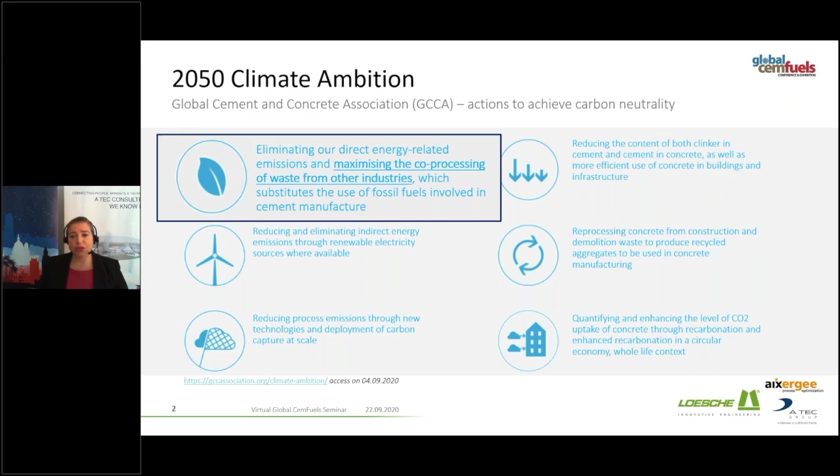And I have to make a side note here. Waste, I do not like this term when it's used in this context, because of course waste is there, but you're not using waste in the cement industry. You're actually using alternative fuels. You're using, let's say, the usable part of waste.

This is a conditioned material, so you're not using waste, and this can actually cause a lot of difficulty with public opinion, especially if the cement plant is applying for a first permit, etc. So I prefer to really use the term alternative fuels and not the term waste.

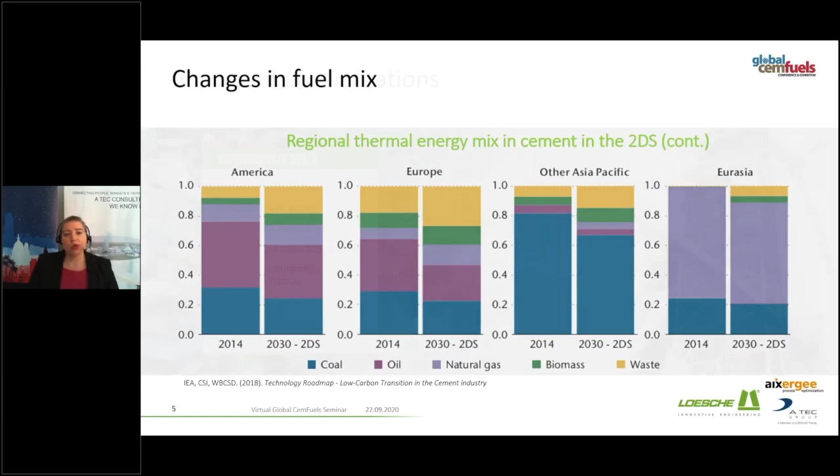Now, if you're starting a project in alternative fuels, regardless of which stage you are at, you need to make some important considerations. For example, external factors that will affect your project, like superordinate goals. If you are in a private cement plant, this is a different thing. But if you are in a big corporation, you will have corporate goals that set targets you need to achieve: CO2 reduction targets, fuel cost reduction targets, and a lot of sustainability initiatives shared between cement corporations and other industrial sectors.

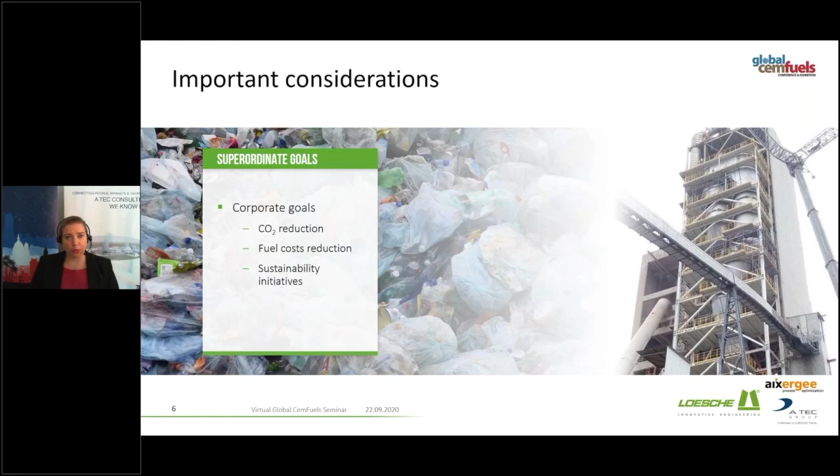So you need to be aware of this while you're gearing up for an investment in alternative fuels. And the second factor is, of course, you need to know your stakeholders and your partners. Why? Because they can make or break a project if you don't consider how they play a role. So of course, local government plays a role, especially in areas where there's not a really developed waste management system.

Waste generators: do you have waste generators around your plant, other industries that can supply you with some monocharge material, which is more controllable? Are there local waste conditioners already, or does this need to be created from scratch? And this really elongates the process.

Who are the original equipment manufacturers that you can count on? What do you want to use? And who's going to be responsible for the complete engineering, for the complete concept that you need in order to achieve your goals?

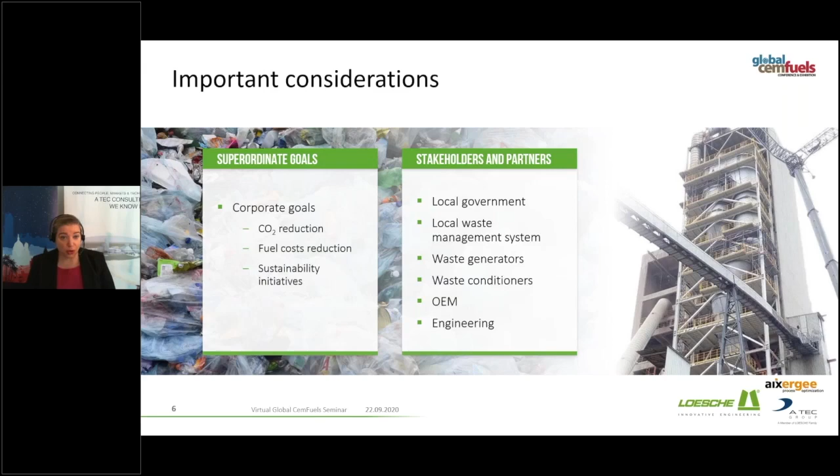And then last but not least, of course, within the cement plant, you need to check what is the fuel availability? What actually do you have around your cement plant? What types of fuels and what is usable for you or not? Do you want to do any type of conditioning within the plant itself? This has advantages with quality monitoring, for example. Or do you want to just buy or get the fuel already ready to use delivered to the plant? What are the quality requirements for your process, and what kind of steps of quality monitoring are you thinking about?

And plant personnel, this is really a big issue, which sometimes is ignored at the project setup, but especially if you haven't been dealing with alternative fuels yet, and there are a lot of plants in the world which are not there yet. You need to get your personnel not only trained, of course, that's not an issue, but they need to be on board with it. They need to understand why you're doing this, because they can make or break a project. The best project, if the people cannot operate it or don't want to operate it, will fail. So you need to take these people with you and motivate them to actually use this.

And of course, logistics. This is a point which is also sometimes ignored, especially by clients who don't yet deal with this. Because of different densities, for example, you need to take into consideration, also on the long term, how much more traffic you're going to generate into your cement plant. And is this feasible? Is this going to actually disturb your normal operation? So this is something that you need to see, and you need to see this on the long term.

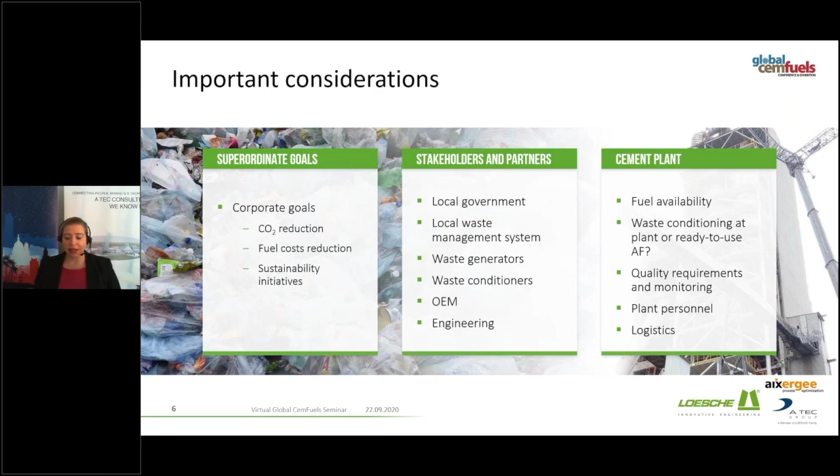And now exactly we're going to talk about short, medium, and long term, because this is something that once you're starting the project, you need to take into consideration. Of course, plans can change throughout the years, but you need to have a long-term goal to see where you're going. And that means that you need to consider, for example, logistics problems, reception and storage problems in the beginning, because you need to make a place for this. You don't want to have to remove the equipment and move it over to another side because you didn't think about it. And it is amazing that this still happens. It seems obvious, but when people are under pressure to put a project together and present it to the board, sometimes these things get really forgotten.

So you need to see and think about what your goals are at each stage of the project. Even if you start small, you want to do less capex, that's fine, but you need to have this overview. What's possible in your plant setup, in your kiln? If you have a preheater kiln, you may have to do a lot more investment to achieve a goal, which might make it unfeasible. We don't know. So this is something that really needs to be taken care of.

Now, one side note here is that, as Andy mentioned in his presentation, CO2 is becoming one of the major drivers. Why? At 25 euros per ton right now, we're entering the fourth period of the European trading scheme. And where the prices are going to go, we don't know. We only know that they're going to go up. There's speculation saying that it's going to go to 30 euros a ton, or 35 euros a ton. And at 35 euros a ton, with oil at about 40, this is a huge driver. So this is something that will actually make projects in the future as well.

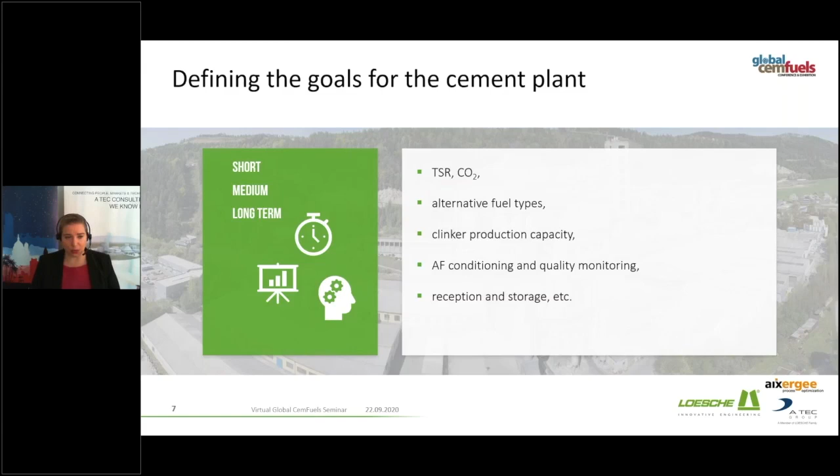Now, as you all know, and I'm not going to spend too much time on it, what the strategy looks like depends on where you are in terms of thermal substitution rate. If you're in the beginning, of course, your kiln is a lot more patient. You can deal with more coarse materials, with more moisture, etc. Still, you need to keep your final goal in check, but you have more external factors that play a role at those levels. When you go into higher TSRs, this becomes extremely crucial, and this is actually where the focus is in the cement plant itself.

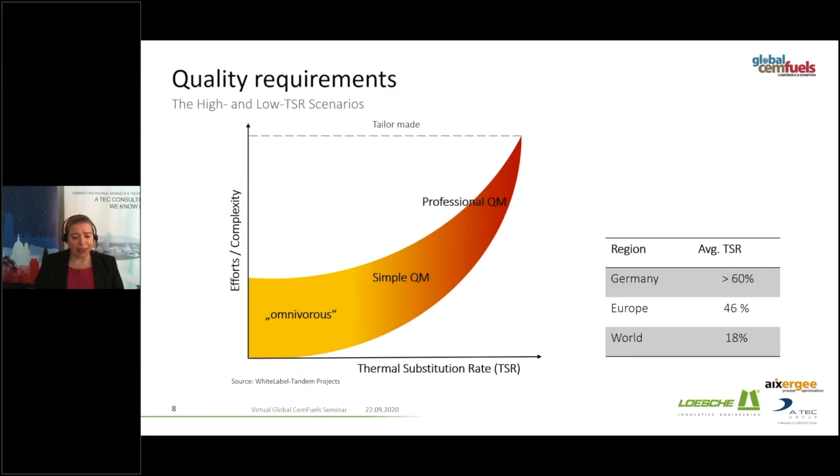So just to give you an idea, we have seen this also earlier today. Germany has an average TSR above 60%. Europe has 46% at the moment, and the world has 18%. I know Andy had 5% in his presentation, but I guess it depends on the sources that you have. Be it 5 or 18, it's very, very low, and there's a lot to do. So there's going to be a need to take on this challenge as well. We're going to start, because it's a more straightforward approach, with what I call the Central European or high TSR scenario.

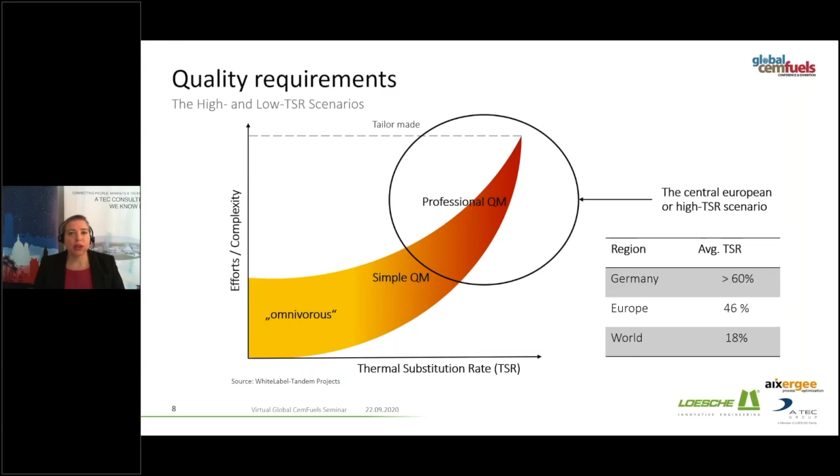So when you're dealing with getting those last percentages of your substitution rate, what is really your potential, what's possible in your plant setup, you really need to go much, much deeper into the process. You need to analyze the kiln setup. You need to analyze your raw material specifications, your current fuels.

If we're talking about a high TSR, you're already starting at a high level, so you're already using alternative fuels. Then you need to go and check what are those fuels, what is the biogenic content of those fuels in view of CO2 emissions reductions, for example. What is the burner setup? Do you have only a central burner for the main burner, or do you have satellite burners? What's possible? What's not possible?

And in order to do that, you should, at this stage, definitely go into CFD modeling, go into a really very big depth of the analysis in order to really make sure that your process is not going to be affected and you're still going to get your investment to be as effective as you can.

And this means that you have to pay special attention to the alternative fuels that you're going to put into, not only calorific value and volatile matter and all of that we know, but also the conveying and the combustion properties. Luigi showed in this video as well in his presentation that you do combustion trials in muffle furnaces. You see how a specific fuel actually is conveyed. You see how this fuel actually acts when it's injected into the furnace.

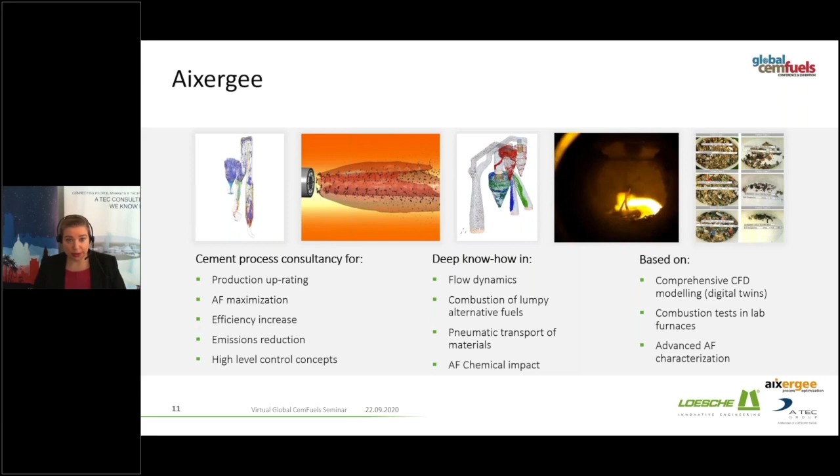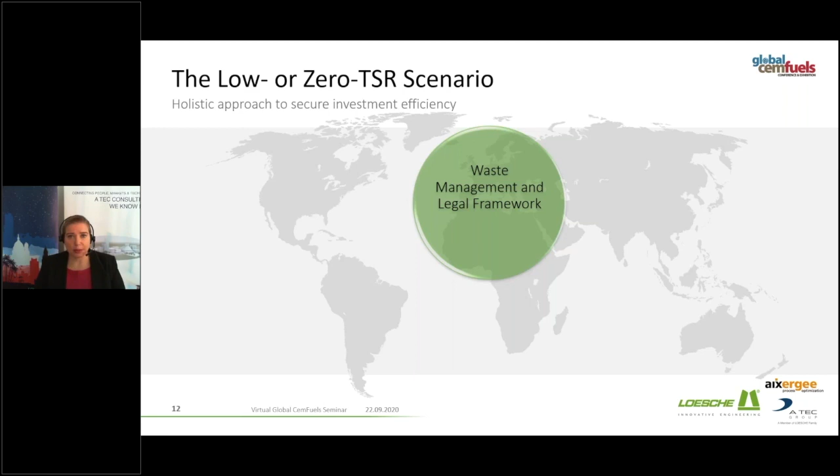Now, when we move on to the so-called low or zero TSR scenario, there's a lot of external factors that you need to consider that are not really directly related to the cement plant. So, of course, you need to take into consideration the waste management and the legal framework. So, are there disposal fees? Is the waste going to landfill the whole time? Can you get the permits? How difficult is it to get the permits that you need for that? So this is something that is not depending only on the cement plant, but you really need to consider before you're going to start any project.

Then you need to consider what's the level of the primary energy prices and also the CO2 prices. And while in countries where there's no substitution rate, the CO2 trading scheme is not really being enforced right now, primary energy prices can play a big role. If you're landlocked in the middle of Africa, you have totally different coal prices than what you would have in a port city in Turkey, for example. So this is something that you really should consider, and this could drive the project as well.

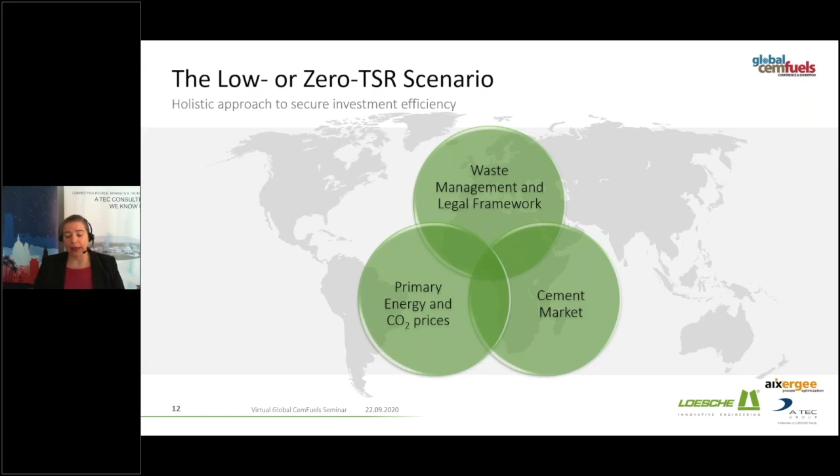And of course, last but not least, the cement market. So where is the plant located? Is the plant working at full capacity or not? If it's not working at full capacity, actually, you can deal with other kinds of alternative fuels than if you really are producing to capacity and you cannot afford to lose 1 ton of clinker. So this just gives you a whole idea of what you need to consider.

And of course, how do you start? So this is the roadmap. This is actually what the title of the presentation is. You need to make a waste assessment. You need to know what kind of waste material streams are around the cement plant. What can you use? Do you have biomass?

Do you have industrial commercial waste? Do you have municipal solid waste? Is it available? Is it not? Is it already available as an alternative fuel or not? So this is the first investigation you need to do.

Then, of course, you need to understand what the market and the technical issues are. So actually, who is the customer? Is it only me as a cement plant, or do I have another cement plant which actually we can bundle up together and really incentivize this kind of investment, incentivize and make pressure on the government? Are there power plants around me that can use also part of this?

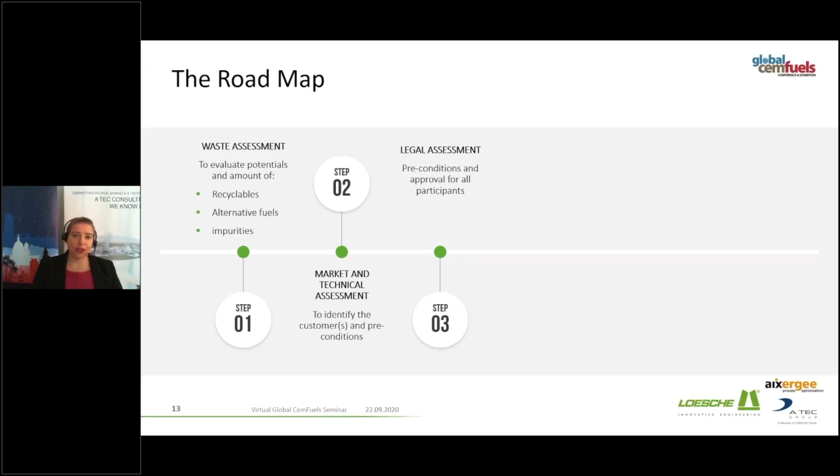What are the preconditions? Then you go into the legal assessment. What do I need in order to get a permit to do this? Do I need public hearings, etc.? This is also a long process as well and needs to be taken care of and taken into consideration.

Then step 4 is that you do preliminary agreements with all the stakeholders. So as a cement plant, you can sign a preliminary takeoff agreement saying, okay, if you supply to me this fuel in this condition, in this quality, I will take it off. And this actually is the basis for investments to be made in waste conditioning platforms, etc.

And then from here on is your normal project development. So you analyze CapEx, you analyze OpEx, you look into what kind of storage do you need, how big is it, the delivery times, etc. And then, of course, last but not least, installation and commissioning, making sure that the staff knows how to deal with this novel sort of fuel if they haven't dealt with it before.

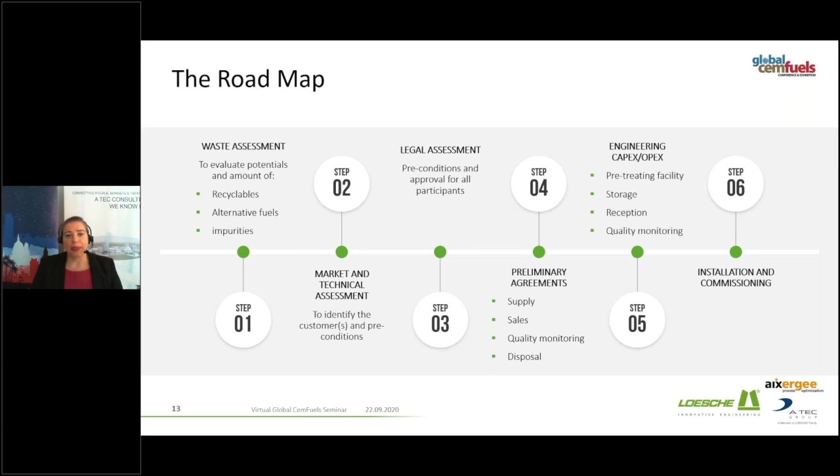And of course, this can be a very, very long process, especially if there is no local waste management system which is developed. So what you can do to shorten this process is actually to start on a short term, and this needs to be negotiated with the local government, to say, look, I will start on a very short term and for a definite period of time with imported materials, be it high calorific fraction that still needs to be conditioned locally, or be it RDF or SRF, which is imported from UK, from Italy, or from wherever. As a cement plant, you can start almost immediately.

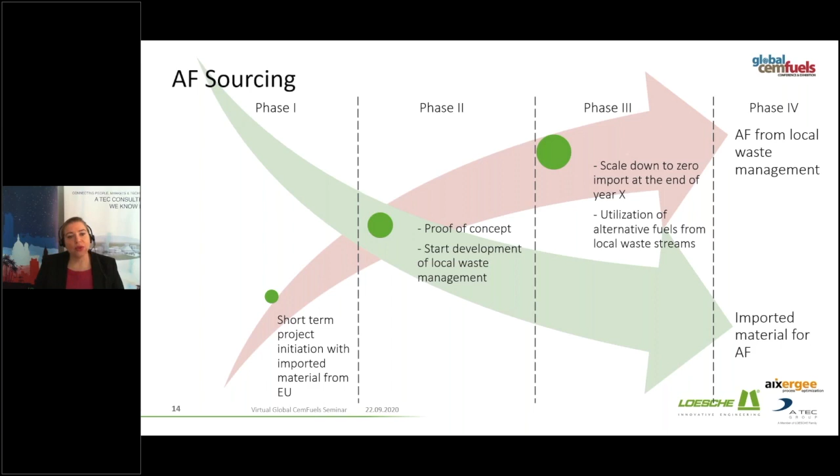And then you say to the government, look, I will do this for X amount of years, but I will prove to you that my concept works, that the emissions that are coming out of my cement plant are not harmful to the population. I will prove that we can actually use this, that it works, that the logistics works, and meanwhile, you can set up a functioning waste management system, or at least a start of it, so that you can tone this down with time, reduce the import amount of alternative fuels, and increase the amount of locally produced alternative fuels, not waste, of course. So that is a ground for negotiation, and to help cement plants get started with this process.

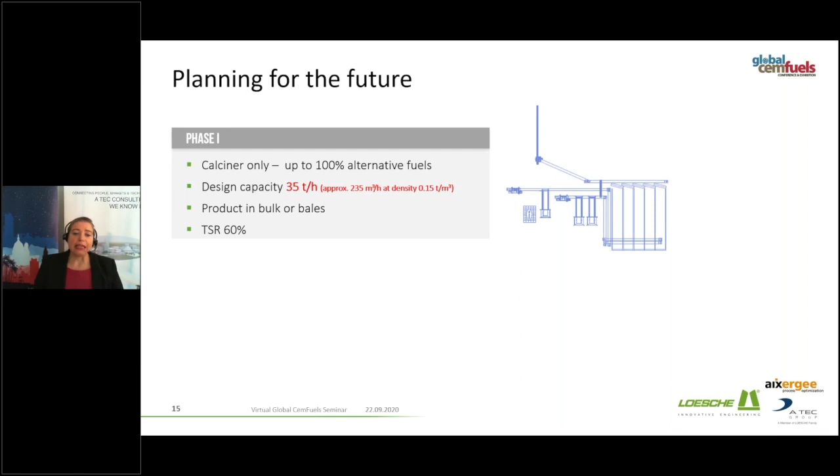And one thing that you have to take into consideration as well, and I mentioned this before, is what do you want to achieve and do you have place for it, right? So you have to see, okay, do I need to put this in another part of my cement plant, or is it okay where it is? So you need to have this, even though maybe phase 2 is going to come in 10 years' time. We don't know, but you need to have this sort of thinking already, ready to go.

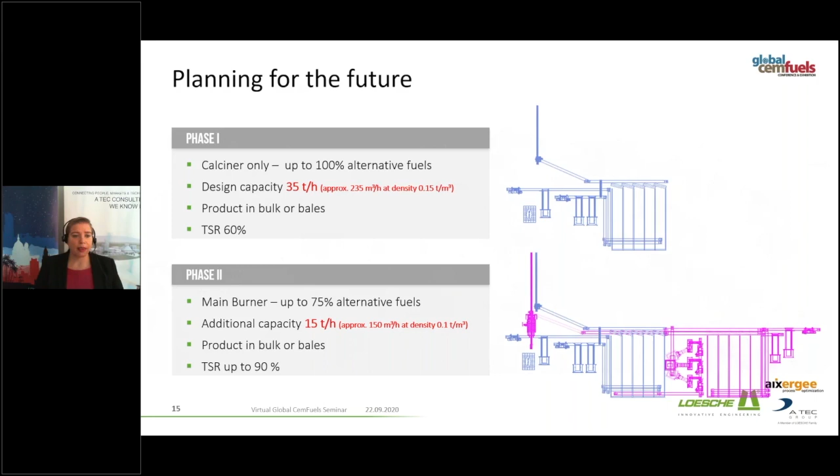Just to summarize, because the time is short, basically the roadmap is that you do a waste assessment to see what wastes are available locally, what you can do for that particular cement plant. You do a technical assessment to really understand the potential of your specific plant. And don't get me wrong, the technical assessment is of course very critical in high TSR scenarios, but it's very important as well when you're starting. You just don't go that deep maybe, but it's very important as well.

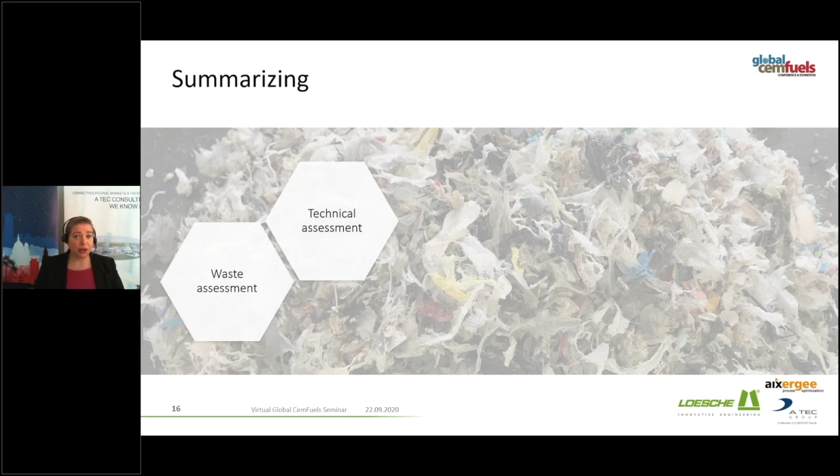Then you need to make a correct alternative fuel sourcing. So you need to actually specify what you really need in order to suit your needs. You need to try to keep the scope as flexible as you can. So modular solutions, things that you can improve on, that you can build on, and not something that is, let's say, simple and cheap, but you will have to take it out completely once you want to increase substitution rate, for example. This makes no sense. And actually we see, unfortunately, many clients going that road. So think really flexibility.

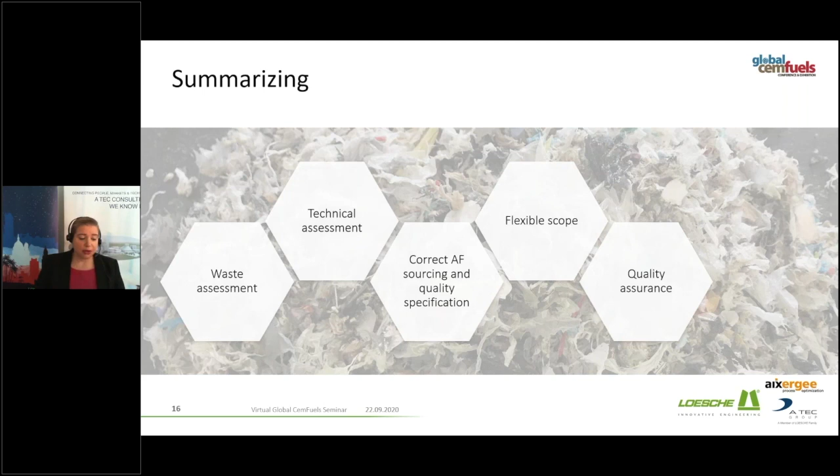And then, of course, quality assurance, quality monitoring, because you want to make sure your system is safe, and training of operational staff. That is the roadmap. That's what you need to do, depending on the stage where you are.